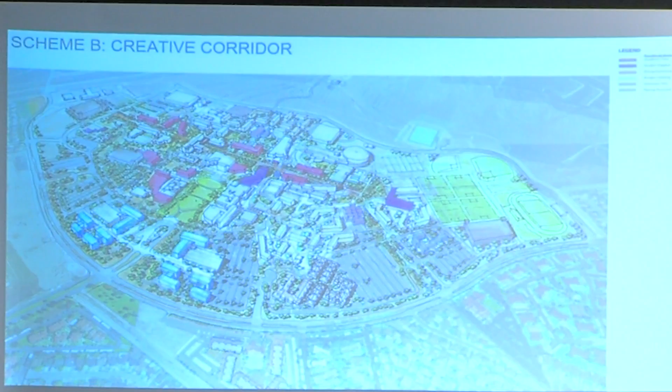We pulled the Discovery Park out to the front door of the campus, perhaps as a major new entry. In this case, the housing went sort of northeast of the library.

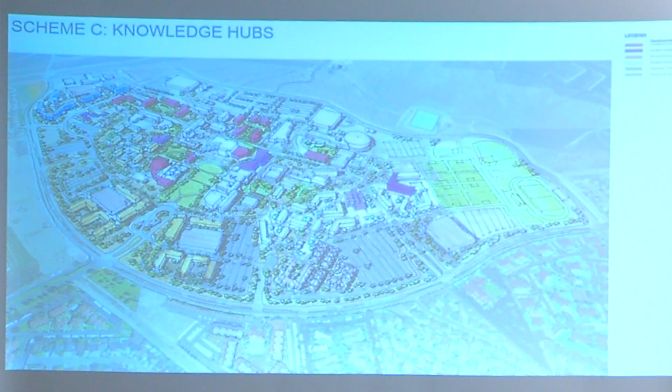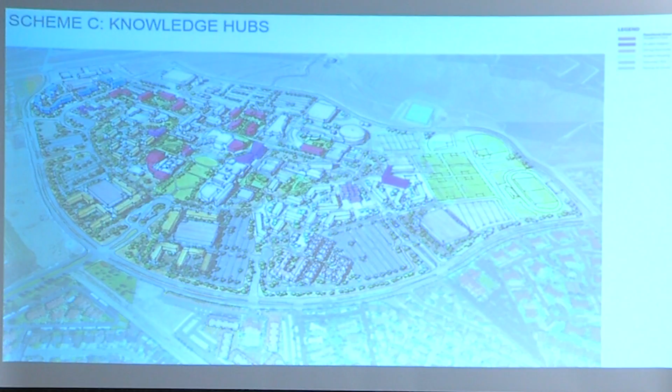And then the third option was a series of clustered courtyards that built on existing areas of academic discipline, like clusters around science or around art or around education, reinforcing existing areas on the campus. In this particular alternative, we pulled the housing out to the front as a front door, and the Discovery Park was all the way up in the very north of the campus.

We evaluated those, as you remember, everybody put dots on the components that they liked of each individual grouping. One of the favorites was the Creative Corridor, or the Main Street, where we concentrated the academic elements along that main street. There was also a focus on a particular landscape plan that concentrated pathways and courtyards in that same fashion.

I'm skipping over that because I want to get to the real meat of our discussion today, and that is what this consensus plan looks like. This is that same drawing that shows what that would look like. In this case, the Creative Corridor was a very important component. The Discovery Park was all the way at the north.

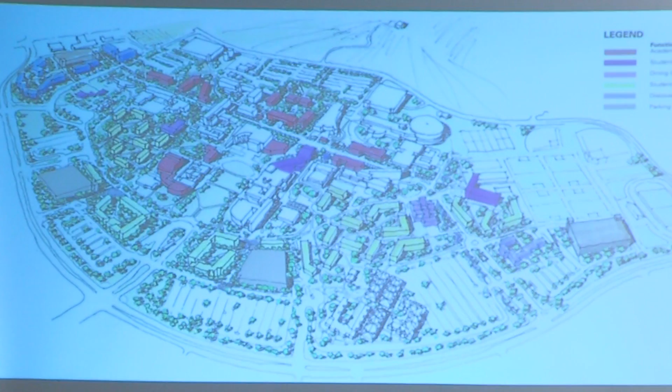Housing would be here in this location, and then new gateway housing here, pulled back a little bit so there was a parking buffer between the community and that housing. And then obviously the rec center expansion, a new conference hotel, new dining hall, second dining commons here, and a series of strategic parking lots that I'll describe in more detail as we go along.

You can see that all of those uses basically total up. We've now put this into the computer, done the calculations to see if we're matching our goals, which, as you recall on the second board over there, set out objectives for specific space needs in a series of categories required to accommodate 25,000 students and faculty staff.

So the yellow is housing, the red is the academic and various components of that. Student support is this purplish color, SMSU here, rec center here. This is physical education. And the brownish color are new parking structures. And this would be the Discovery Park or Innovation Park.

So it basically creates a main street and a neighborhood street. Main Street is obviously Coyote Walk that runs through the heart of the campus with terminuses at each one so that you reach some destination. In this case, the athletic fields, rec center, and the dining hall. At this end is the Discovery Park and the Arts District here.

And then Sycamore Walk, the residential walk, connects all of the housing. It's like a neighborhood street in a way with a second dining hall there. And I'll show you in a second a series of connecting east-west pathways that go through the campus to connect both from the parking into the heart of the campus from north, east, and west.

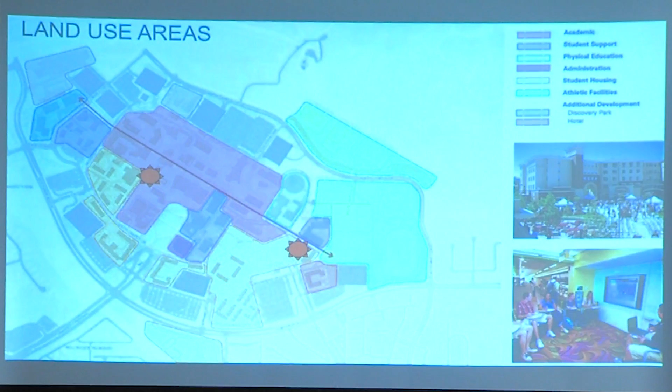Just a series of diagrams showing the land uses, and those two starred elements are the two dining components. Dining is obviously a big focus on all campuses, and by distributing them on the campus in such a way that they're serving two distinct, distant ends, we really do provide it in the right locations.

Each building is noted here in terms of its use. This, for example, is the new CEL location just north of the library, along Coyote Walk. A series of fine arts and science buildings surround the new courtyard along Coyote Walk. And then this would be the new SMSU expansion, and new library expansion. As mentioned before, housing would be distributed into a housing village here, a second housing village, and then this gateway housing, which we envision as apartments available for young faculty as well as upper-level and graduate students.

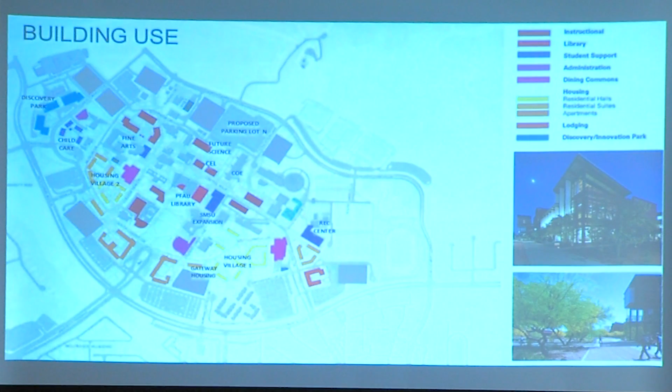I won't bore you with this, but the numbers are basically a way that we keep track as we go along, to measure whether we're accomplishing the goals we set out. We're maybe 30,000 square feet off one way or the other, out of the overall 1.2 million square feet across all categories we'll need to provide going forward. We've also listed out the housing in a series of more complex tables showing the number of floors, the footprint of the building, so we have a way of tracking all of these things going forward.

That covers those elements, and we also looked at what kind of reinforcement we're doing to existing academic districts. I can't read this clearly, but this is science, behavioral sciences, this is arts, a continuation of arts and performing arts, this is business, physical education, and education, again along that same major walkway.

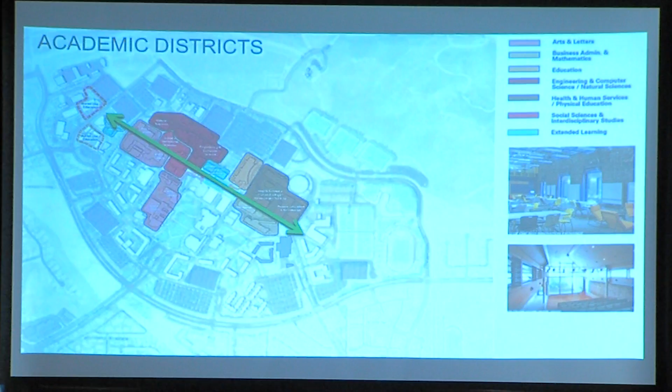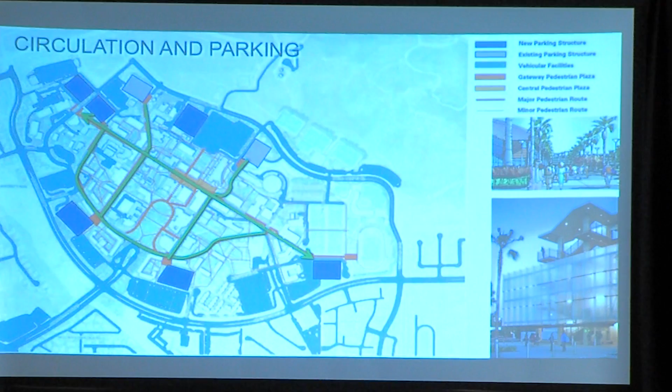Now this is the parking layout, pedestrian circulation, and vehicular circulation. We still maintain the loop road, built on the existing Coyote Walk and Sycamore Walk. We're also emphasizing those two components, plus two elements that go east and west, and they terminate in parking structures, both north-south and east-west, so you have a clear way of finding your way in the campus once you get out of your car. Since they're all on the loop road, access internally is also very easy.

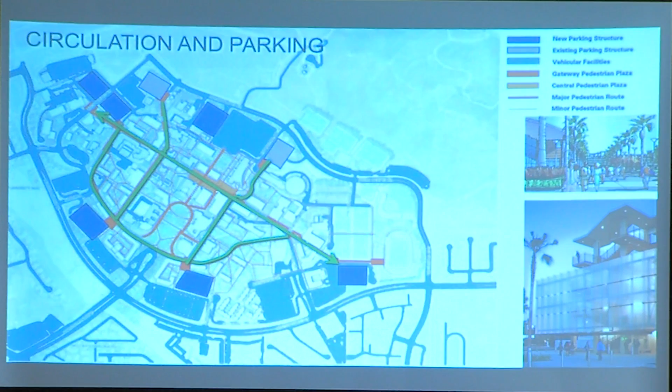We're also changing the way we circulate into the campus. Right now you come in and can turn left or right into parking, which creates a messy conflict between pedestrians, automobiles, and buses. By eliminating that east-west connection, this turns into a bus turnaround and drop-off, and car drop-off only. You'd enter either here or here, with a new entrance here. We're suggesting you'd enter this parking structure there, enter here for this other parking structure, or enter here, where there's a bus drop-off and turnaround serving access into the campus, the rec center, and the athletic functions, including the new football and baseball stadiums.

So the parking—well, there's a stadium, but not necessarily a team, just a facility that would be... soccer, okay, soccer. Well, that's football, depending on where you are in the world.

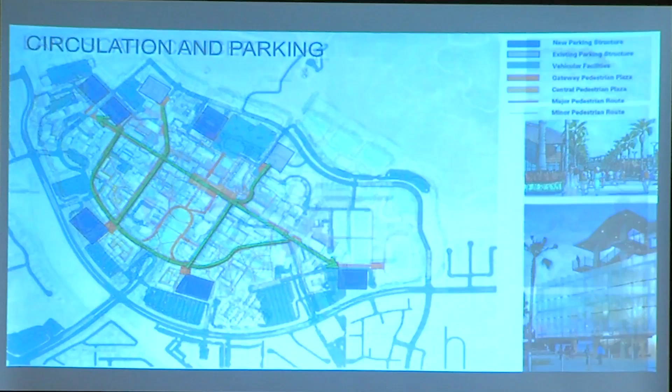We're now beginning to develop more intense landscape concepts. This is our first take on the plan, meant to show how all three plans came together based on your comments and feedback from the steering committee. There's a lot more work to flesh these things out, but you can begin to see the framework we're going to build on.

A lot of the comments we heard called for smaller, more shaded courtyards rather than the big expansive ones we have now. So the buildings have been infilled to create a series of smaller courtyards, where we'd see more shaded, lush landscape areas, while trying to find more sustainable ways to plant other areas. Obviously we wouldn't touch the signature lawn of the main campus quad with its terminus at Pfau Library—we're building on what's here and treasured on campus as we move forward.

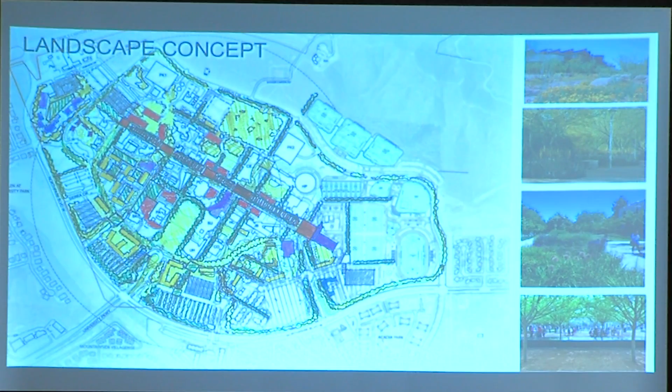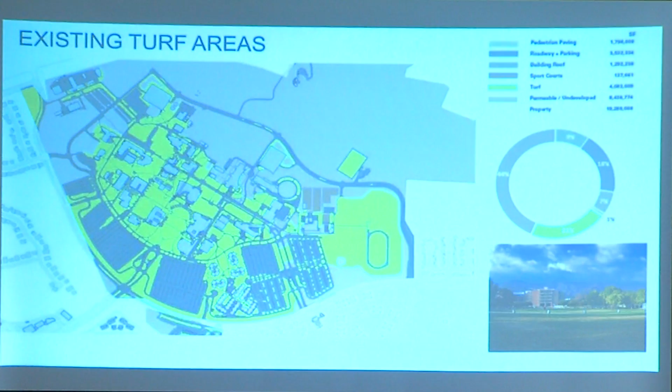I show this diagram because we're just beginning this now, but this is one of the elements we're going to be looking at. That light green is basically all the turf areas on campus, over 4 million square feet. So the idea is we want to reduce that so we save water. We don't want to just turn it into gravel or something, so we're investigating a lot of different kinds of plant materials that are more sustainable.

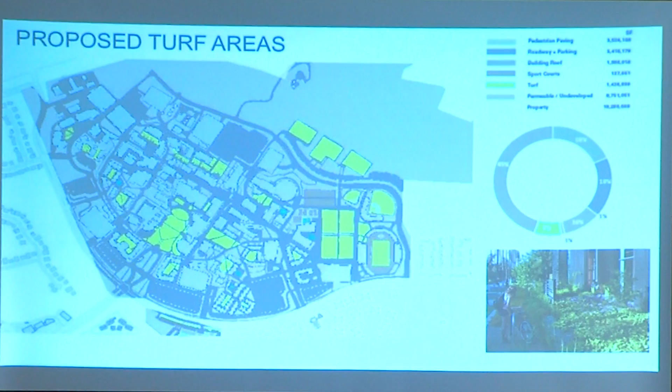Here you can see we've still got a lot of work to do on this, but the idea would be not that those other areas would be unlandscaped, but they wouldn't be lawn areas. We would concentrate the lawn areas in these smaller courtyards and in the student housing areas, for example, and of course in the main lawn. And then we're looking at creating a series of zones that would be zero water use, moderate water use, and so forth, and then lawn areas. So we'll have a series of plant materials that will fit into each of those zones, and we'll be defining those as we go along.

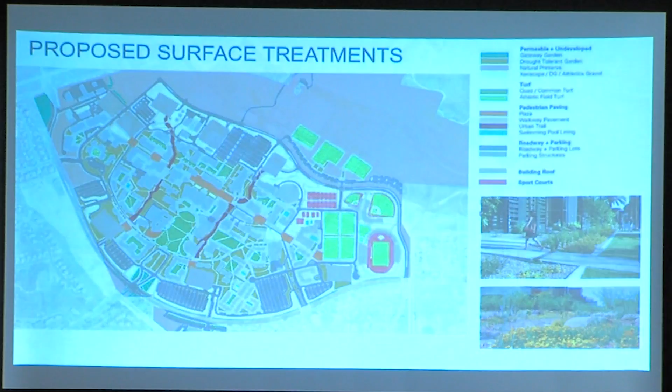This is the illustrative plan, another beautiful drawing by Jonathan. It doesn't designate just yet what the new buildings are, but you can begin to see the texture of the campus. And if you think about what's there now and what we're infilling, it's much more dense. It means that getting between buildings is going to be shorter in time, and if we are successful in getting the shaded connections between them, this is going to be a much more comfortable place to come to school and learn and to teach.

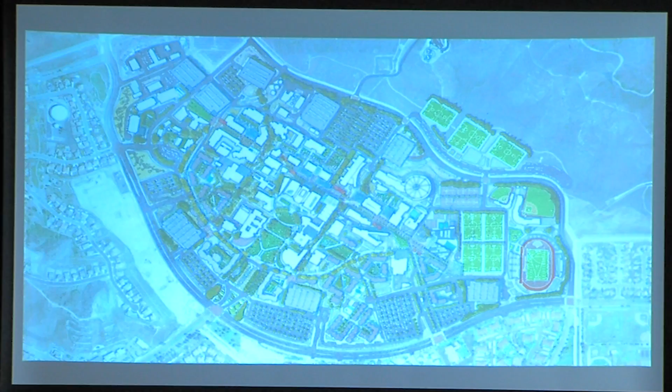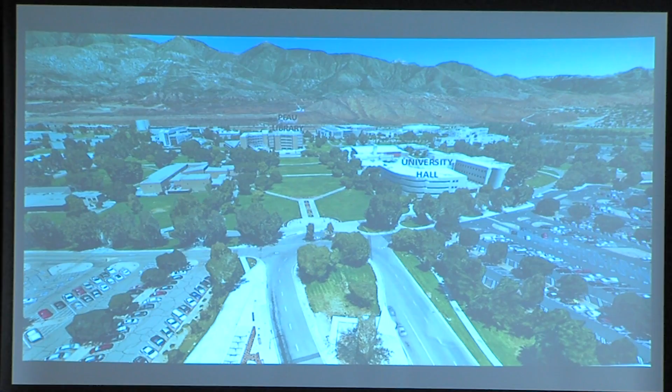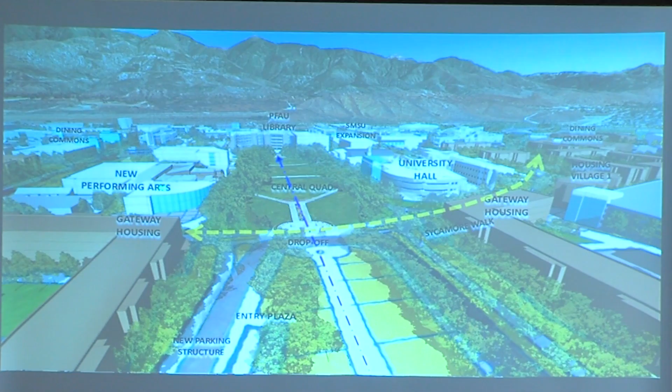This shows a new performing arts center here with a kind of lobby and a plaza out front so that events can spill outside. It's at the front door, it's near parking, you can see it when you come in, you know where you're going. And if ultimately admin is moved into University Hall, then that's also at the front door, if you will. This, for example, this parking structure here, entry plaza with signage that would direct you either to administration or over here to performing arts or wherever else you might be going.

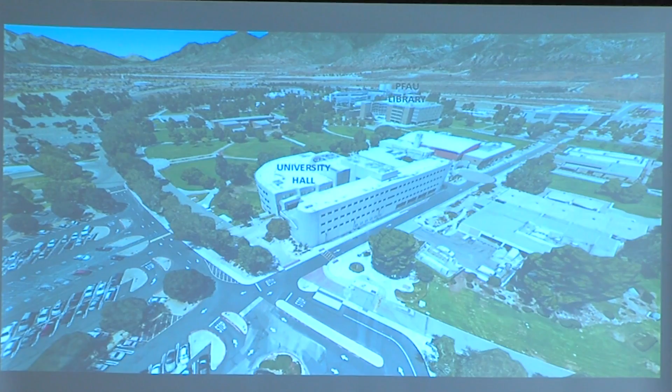This is a view above University Hall. This is kind of Sycamore Walk as it exists today with the parking and the drop-off here, Pfau Library. And then this is kind of an enhanced Sycamore Walk that is framed with housing all the way along, screening the parking structures from everyday view, and creating this kind of residential street connecting both Housing Village up in the north here and the Housing Village, which is just here. This, of course, is the SMSU expansion and the library expansion here.

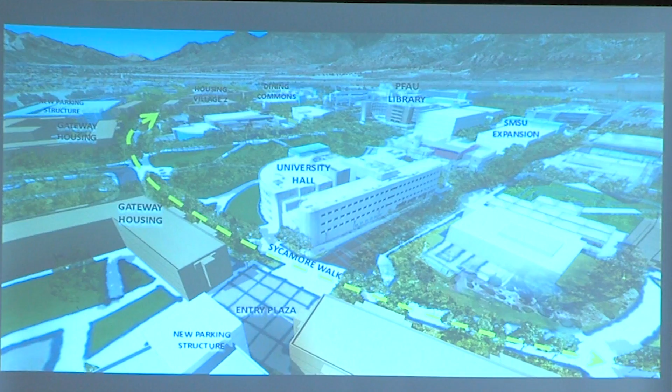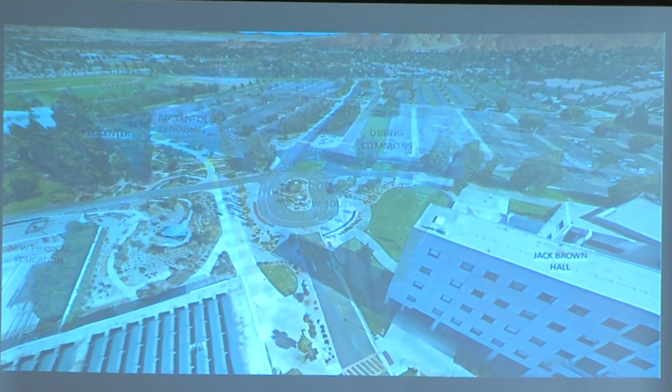Now we're coming around and looking over the top of Jack Brown Hall. This is the turnaround drop-off that exists now. I've forgotten the name of this road when it comes in — Coyote Drive, that should be easy, I should remember that one. And then this is the rec center here, hidden behind those pine trees. In the future, with the rec center expansion, that would come out here to the right, creating a courtyard for a new pool here.

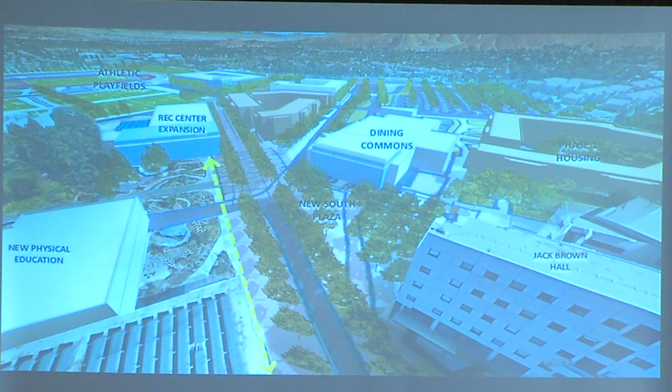This is at the terminus now of Coyote Walk. The new dining commons facing out onto a new South Plaza, Jack Brown Hall, and this is the Phase 1 housing, which, as you know, is getting ready to start fairly soon.

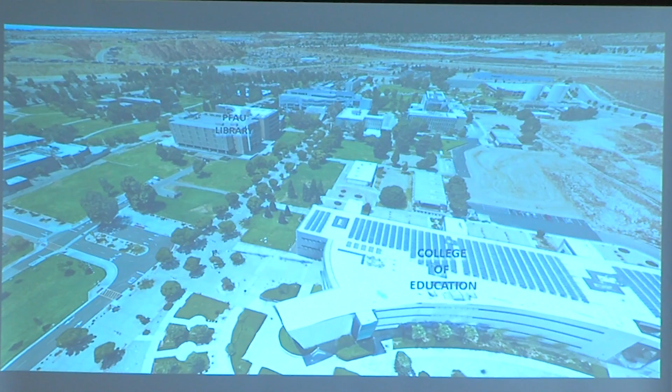Now we're looking along Coyote Walk with Pfau Library, College of Education. Here's Coyote Walk. And then this is the new expansion of SMSU, bringing it up to Coyote Walk so it links with it. The idea is that there would be on the ground floor probably some kind of food service cafe that would spill out with seating along the walkway. Second and third floor could be meeting rooms with these beautiful views of the mountains. So it's pretty exciting with a courtyard in between the new library expansion and SMSU, so that meeting halls and banquet halls would have a courtyard to spill out onto in between.

This location here just north of the library is for the new College of Extended Learning. One of the things in talking with the dean and the steering committee was that the international students in Yasuda Hall are kind of isolated from the rest of the campus. So as they expand and it has other shared uses in it, it should be more central to the campus.

So we're bringing it into the heart of the campus. The ground floor would probably be large lecture halls. We can probably get about 10,000 assignable square footage available for shared use, so classrooms, large lecture halls, and so forth. And then this would be a future science building, could be connected to existing science there, obviously College of Education.

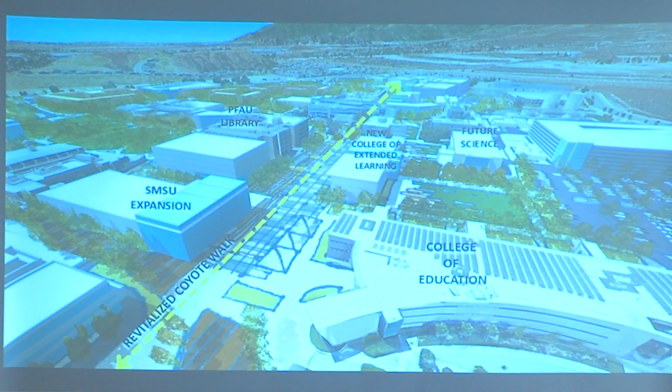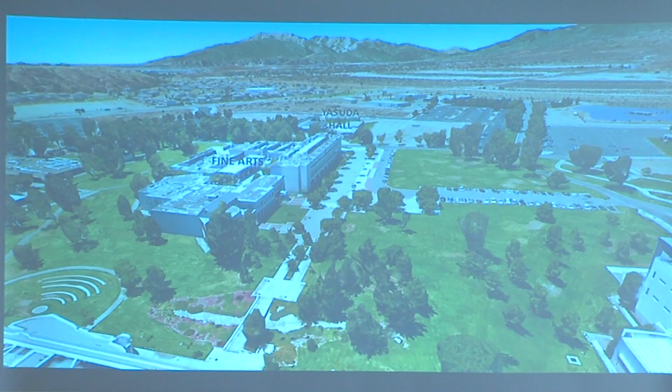Moving along Coyote Walk to the north, this is obviously the Fine Arts Complex here. This is a little, we're like standing on the roof of Behavioral Sciences here. We're creating another academic sort of courtyard up here, some of which might be future arts buildings, other just general classrooms, or it could be science.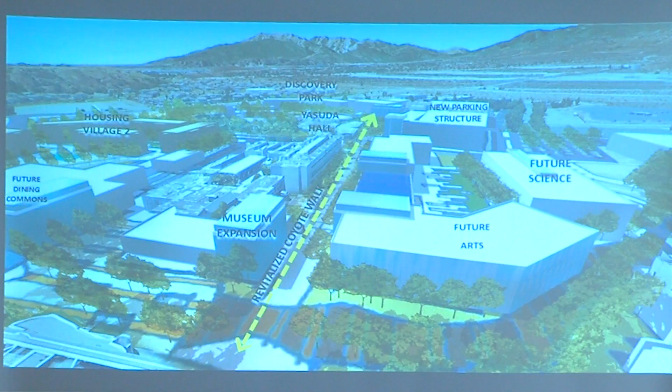An expansion of the museum. They have a concept for this becoming a kind of joint study area, exhibit area that students would have Wi-Fi and seating so they could come inside and be cool, get a taste of the museum, be right along the walk. So again, we envision all of these buildings to have a glazed, at least first floor, so that they're really inviting, and you see what's going on, and you're drawn in.

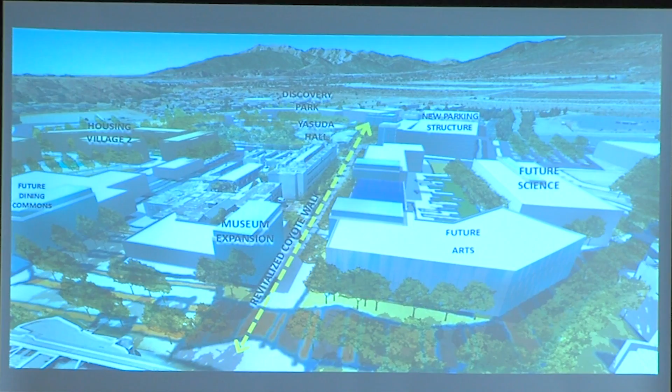And this we're looking at as an enhanced kind of, we call it a bioswale, but it's a more natural landscaped area that also handles some of the stormwater drainage. The new dining commons would probably have outdoor seating that faces onto that, so it's a great amenity that comes down through that part of the campus.

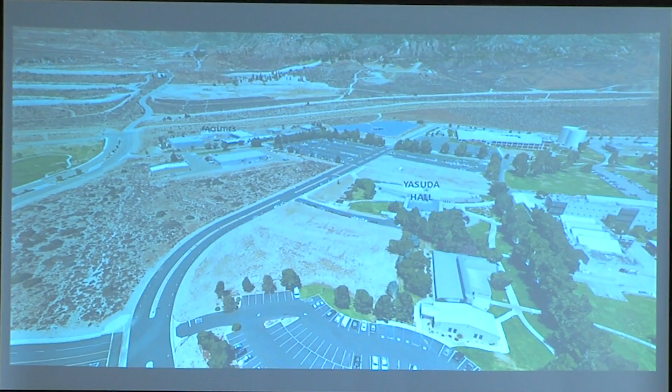At the very north end, there's facilities, and Yasuda Hall is where we'd planned for the new Discovery Park. The campus has been having discussions with the County Sheriff's Department for putting a public-public partnership together to bring a crime lab onto the campus, much like they did at Cal State LA, which could be pretty exciting. And again, that would be kind of at the terminus of Coyote Walk.

Yasuda Hall, there's still some room here for some expansion. We're thinking perhaps that becomes an alumni center at that end of the campus. And then childcare would be moved into a location where they could expand. This is roughly would house about 200 children.

The size you need for that is about 100 square feet, indoor and outdoor, for each child. So this provides that kind of space. We have a drop-off area in this parking lot, so you could drop off your children and then go park easily.

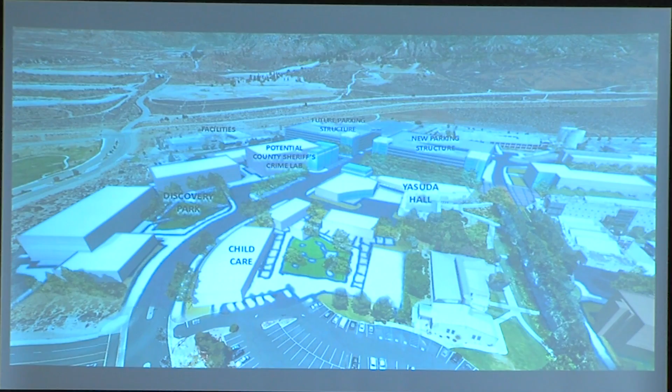I want to go a little bit into detail about the College of Extended Learning expansion, which is one of those near-term projects that Jeff mentioned. And it's exciting because of the time frame. It's already in process, so by expanding it, we won't necessarily slow that down, and it could be in place in as little as 2 years, maybe a little longer.

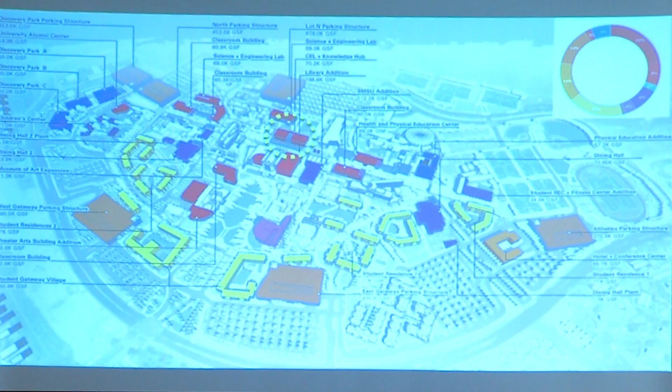And this is kind of from the library, looking at the site that we have recommended, which is between College of Education and Science. It would be right in here, and this is kind of that location. You can see it's just across from the new Student Union expansion and Pfau Library expansion, and kind of really in the heart of the campus.

So those shared classrooms would be in an ideal spot. And then the international students, of course, would be also drawn into the main campus.

I know there's a little detail, but there's about 35,000 assignable square feet that's required in the CEL expansion. If we expand the building to about 45,500, we can get 10,000 ASF, or assignable square feet, for campus-wide use. That's probably a 250-seat lab, classroom, a couple of 100-seat classrooms, and then maybe 4 or 5 smaller ones of 50 or 40 or 50 seats. We haven't decided on the exact program for that, but that 10,000 would roughly accommodate that number of facilities.

This is its location. You can see it's kind of in the heart of things. There's a courtyard that gets created just to the north of it that we see as having a fantastic view of the mountains. And then if a future science building comes in, it creates another courtyard that continues the ones that are already in the science complex.

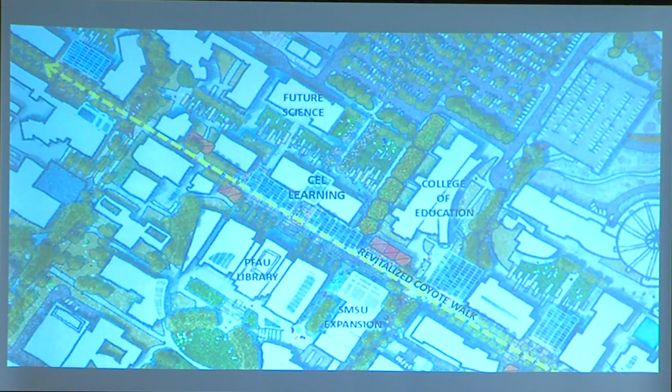The idea is that there may be an orchard here along this side of College of Education, where those barrel cactuses are right now, and right next to SMSU expansion and the library expansion. Just a quick sketch, the idea would be that there was a passageway through. It would have a glazed screen so we could protect it from the wind, but you could see through and pass through the building into the parking and into the courtyard beyond.

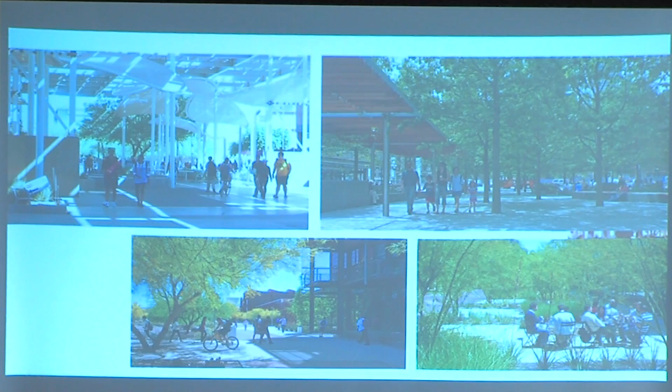And just the flavor of some of those things along Coyote Walk that we're looking at. We talked about this in the last forum, a series of perhaps solar panel shaded structures that are tall enough so you can have food service underneath, even trees underneath, and they connect buildings and provide these outdoor shaded spaces. It also could be shade trees like this, or more desert type plant material that provides shade but is less water use intensive.

And then, before we finish, I'd like to talk a little bit about this downtown center that the President mentioned earlier. The one building we're looking at is on E Street, right here. It's connected to this parking structure with a bridge on the 3rd floor from the parking structure directly into the building.

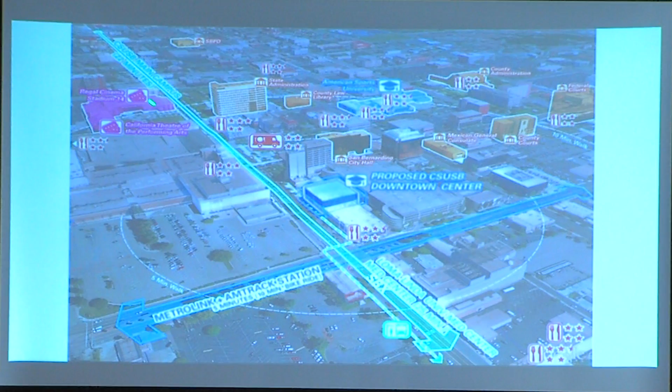We kind of tried to identify what else is around this. Obviously you don't want to just be in some place that's away from everything else. There are quite a few services available, restaurants, food of various kinds. It's right next to City Hall, and this is the old Radisson Hotel here. By the way, the SBX stop, the high-speed bus that goes back and forth to the campus in about 20 minutes, is just across the street. So it seems like an excellent location.

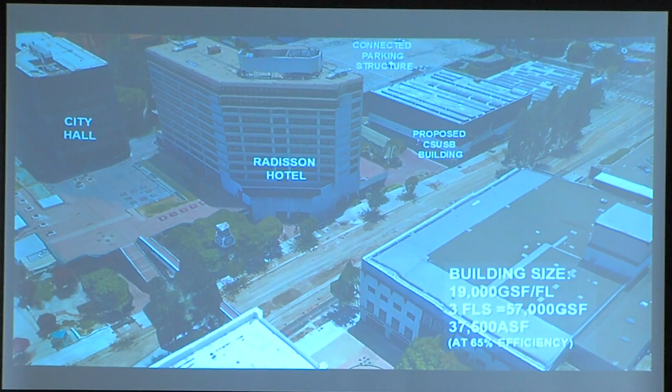There's just a close-up of that. The building itself is about 19,000 square feet per floor, that's gross. But you'd get all 3 floors, if you got the whole building, about 37,000 square feet total, which is a lot of space.

I wanted to give you a total sense of how much space we're thinking we may be able to dig out from all these various components. First of all, I mentioned the new CEL, about 10,000 assignable square feet there. Now CEL currently has a number of functions scattered around the campus, totaling about 9,200 square feet, so that would be freed up and could be reused.

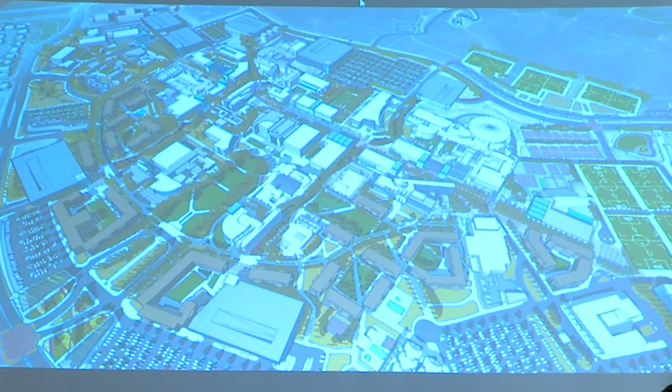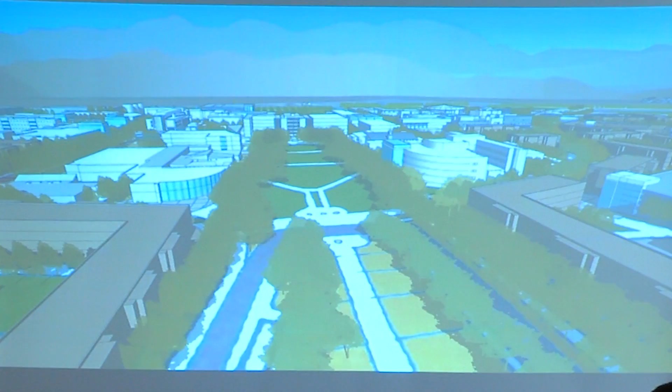So here is that first view I showed you earlier, coming into the campus with the new housing, maintaining this kind of view of Pfau Library with University Hall and the new Performing Arts, and the turnaround drop-off area. Now we're flying around so we're looking back to the north, again along the new Sycamore Walk with housing all along the walkway there. And this is the connecting east-west pathway that goes all the way up through near Education and the new park and the existing parking structure up here.

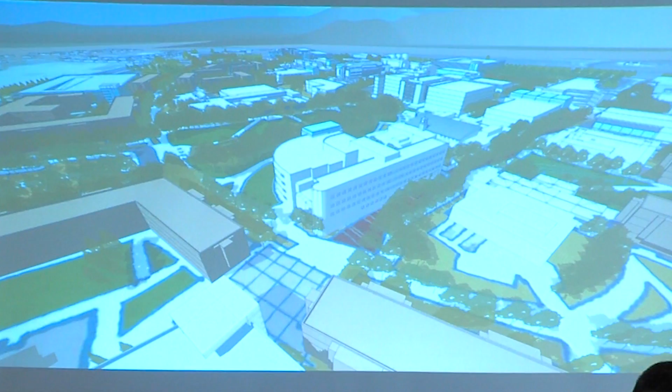I think Richard and I were talking earlier about what we're doing with the housing in the front of campus as really honoring the best part of campus, which is this common out here. That's the best asset in terms of landscape. So if we can frame it, set it up, and create a more graceful entry into campus, it's really building upon what we have.

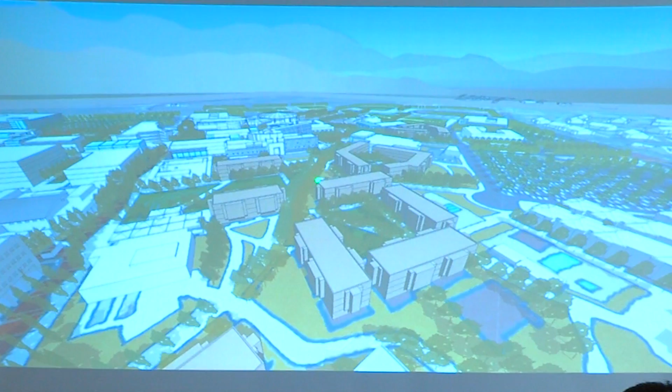This is the new south housing. This would be phase 1, with the dining hall beyond. This would be infilled here, taking out Serrano Hall Village. This is the existing commons, and this is health. The idea is that you create a residential quad here framed by housing that brings you down to Sycamore Walk, so you could come there and go directly over to the SMSU.

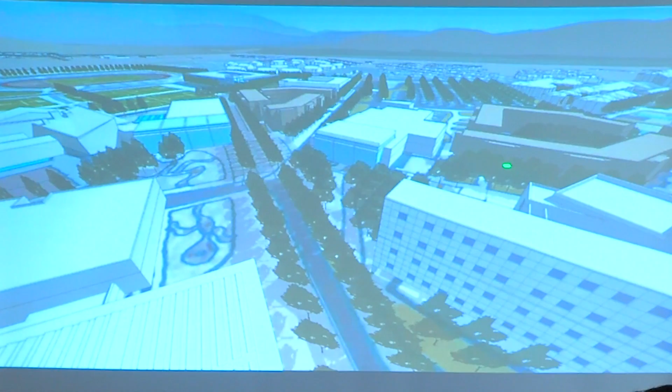Now we're coming up to the southern terminus of Coyote Walk, and here we have the expansion of the rec center with the pool in the courtyard. The walkway is right here, so the idea is that this is kind of a terminus. You can then slide off and go over to the parking structure and the athletic fields beyond. This is another phase of housing, with dining here that has outdoor seating fronting onto the plaza. This is the current phase 1 housing, and of course this is Jack Brown.

Now we're turning around, looking north along Coyote. Again, these are the same images you saw earlier. So this is the SU expansion, the library expansion, the new CEL building. This is the College of Education and Behavioral Sciences here. A new academic building here that could be tied to business.

In our conversation before we started today, what excites me about some of these spaces is that what we have now is kind of a monoculture of just grass. Grass is great, but it takes a lot of water and you can't do a whole lot with it. So what we're looking at is differentiating the different landscapes on campus as we add to it.

In this view, we've got these collaboration courtyards in the back, which are a kind of joinery between some of the new buildings, be it a lab or a classroom across that courtyard from each other. And if you can reformat Coyote Walk, expand the pavement, create permeable paving with better shading, cafes facing it, classroom buildings facing that, you've got people spending more time on campus studying outdoors in shade.

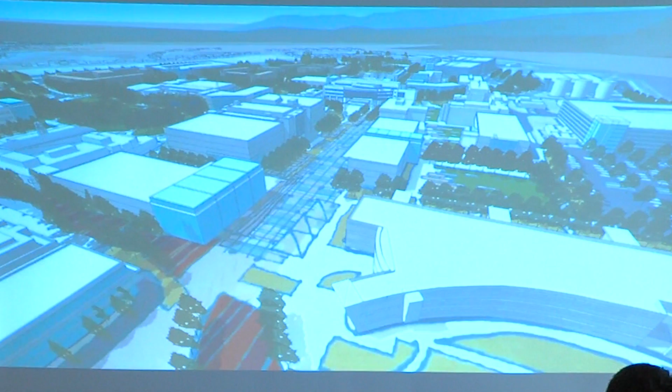At a junction like this down here, you've got this urban trail, which is a kind of realignment of that road as a pedestrian access from new parking structures. You've got students doing three things at three points in their day, meeting right at the student union. So really, this could be a kind of busy intersection, a kind of downtown CSUSB.

So we just went over behavioral sciences. We're standing on the roof there, looking into this new academic quad just to the east of the arts complex. This would be an expansion of the museum with a ground floor lobby study area right along Coyote Walk. This may be arts, it could be a classroom building; this may very well be science, and this could be another classroom building in the future.

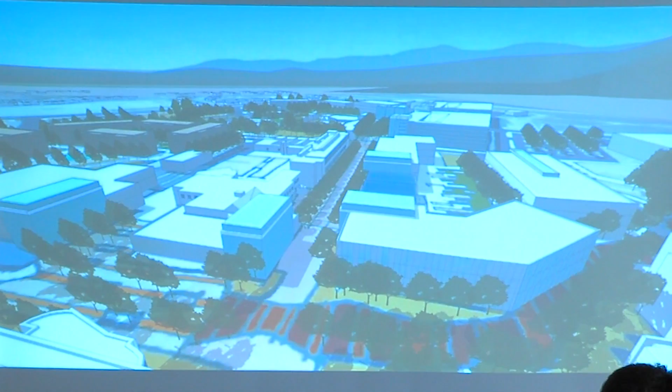This would be a new dining commons facing onto this urban trail, and then the second housing village here, so that we're beginning to activate the northern part of the campus, which is currently relatively unpopulated. And then beyond, at the very terminus, you see Discovery Park here.

Again, a parking structure at the terminus there with an elevator tower that's lighted at night. Looking back down Coyote Walk, you would be right above this potential sheriff's office crime lab, or whatever the joint project might be there.

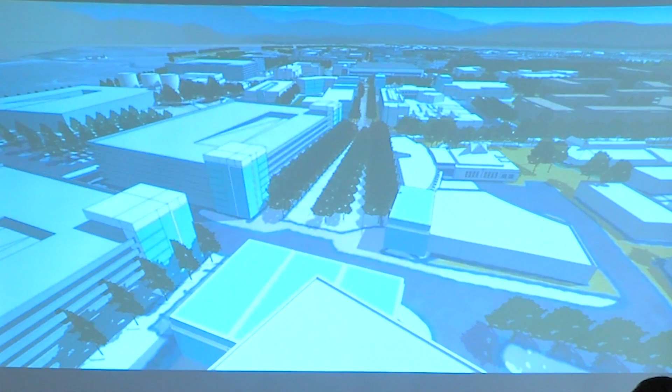I think a preoccupation we've had as designers is to really create a series of gateways with clear entries, better accessibility into campus, and also a better sense of arrival and departure at either end of Coyote Walk, which is kind of an embedded asset. So we're obviously trying to put a good piece of programming, be it the rec center, Discovery Park, or potentially the Sheriff's Crime Lab, at this end, with accessibility to those parking structures.

Something I wanted to interject about here is the amount of parking structure in that upper corner, which is something I hear people talk about—parking is on everyone's mind every morning. I think we've seen a potential drawing for a roadway connection around campus to complete the Circle Road. We know the city is seriously considering that, and there's a lot of capacity on that loop road. So putting parking structure capacity in the back corner there makes a lot of sense in freeing up our ability to look better at the community in the front.